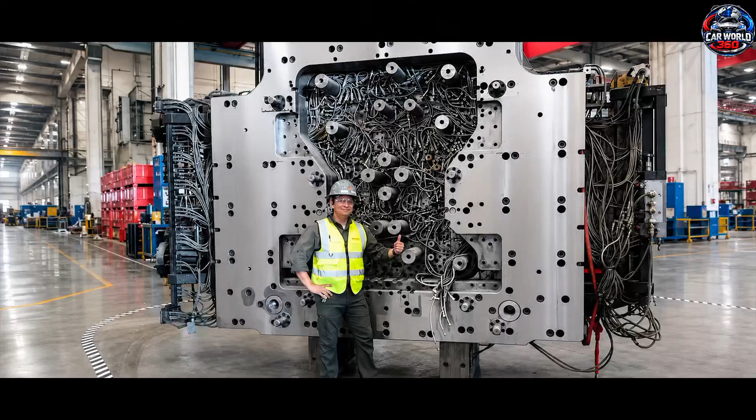This could be the largest automotive casting system ever designed, and if the latest reports are accurate, Tesla may be preparing to push Giga casting into territory the auto industry has never seen before. We are talking about a potential 50,000-ton class Giga Press, a machine so massive that its purpose is not simply to make a bigger car part, but to completely rethink how a vehicle is manufactured.

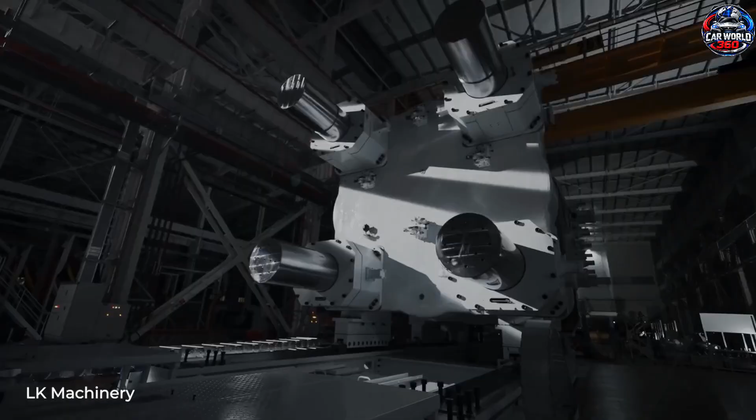And here is the crazy part: Elon Musk has openly talked about finding the limits of physics when it comes to casting machines. He basically asked one simple question: how big can a casting machine actually become? And his answer was even simpler: let's find out. Today, that question is becoming more interesting than ever, because reports and industry discussions surrounding a possible next-generation Tesla casting system suggest that the company may be exploring an enormous machine capable of producing much larger structural components with far fewer individual parts.

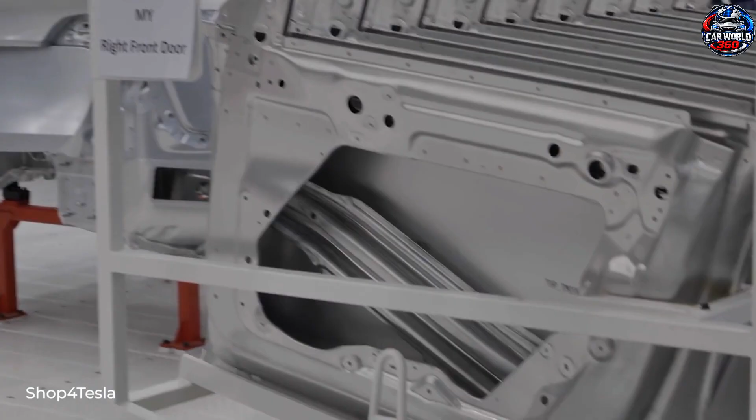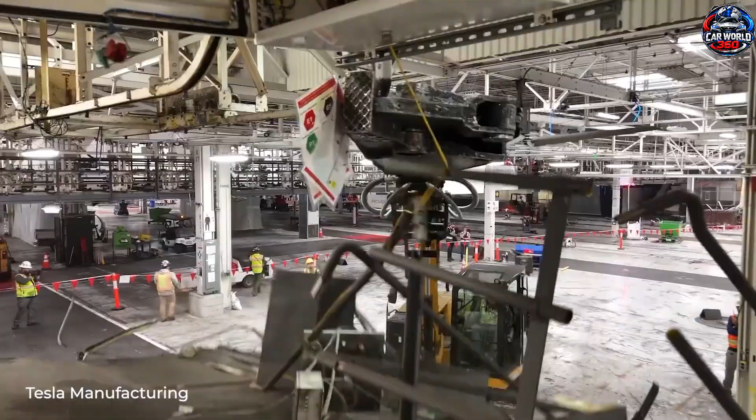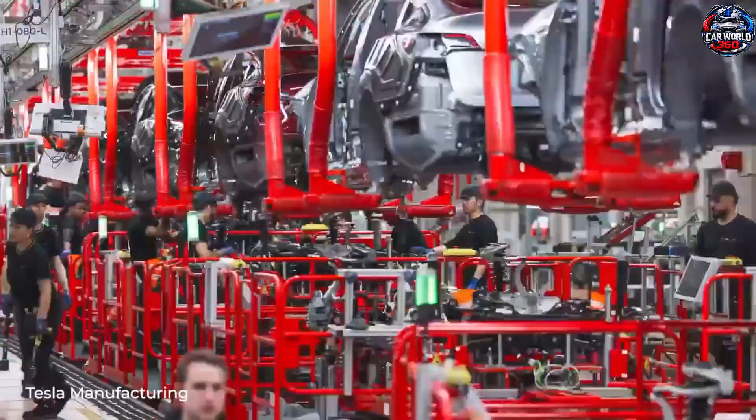Because what Tesla is trying to do here isn't just about making a bigger machine. It could change the entire production philosophy of the modern automobile. For years, Tesla has been surrounded by arguments about where the company is heading. Some people believe Tesla is becoming more focused on artificial intelligence, autonomous driving, robotaxis, and Optimus, while others argue that the foundation of the company is still its ability to manufacture millions of vehicles efficiently.

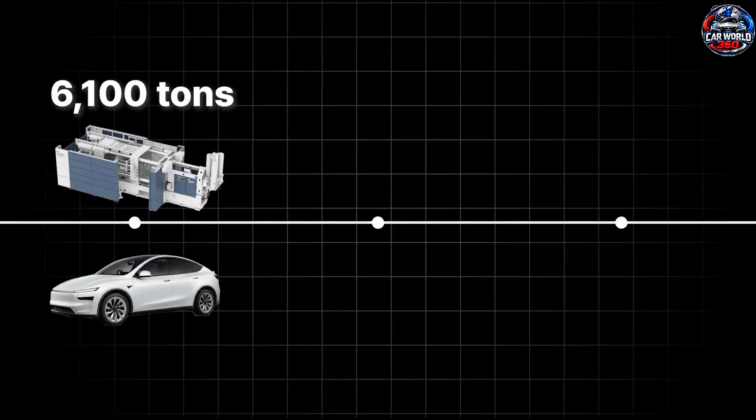And that second point is extremely important. Because while the public conversation often focuses on robots and self-driving technology, Tesla continues to work on something much less glamorous, but potentially just as powerful: how to build a car faster, with fewer parts, fewer machines, fewer workers, and fewer manufacturing steps. And that is exactly where Giga casting comes in.

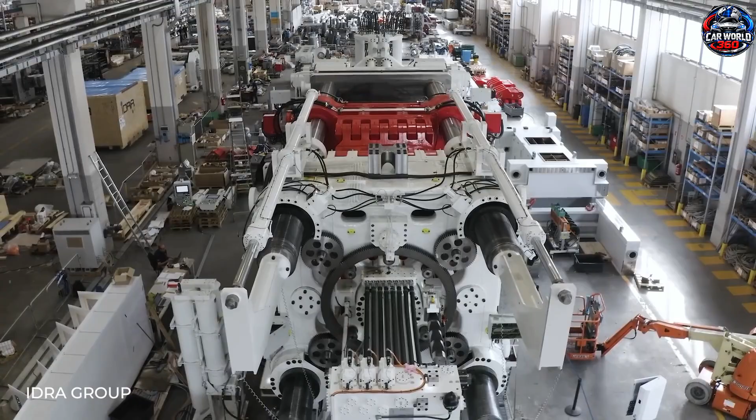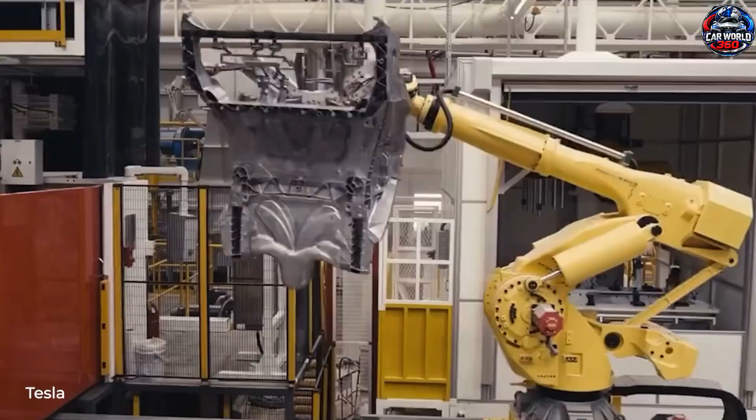Tesla's original Giga Press already changed the way the industry thought about vehicle structures. Instead of building a large section of a car from dozens of individual stamped and welded pieces, Tesla began using enormous high-pressure die casting machines to create major structural sections as single aluminum castings. That sounds like a small manufacturing improvement. It isn't. It changes the entire factory.

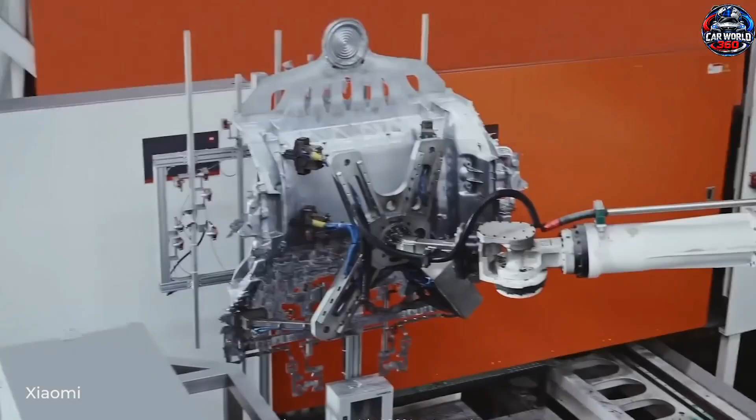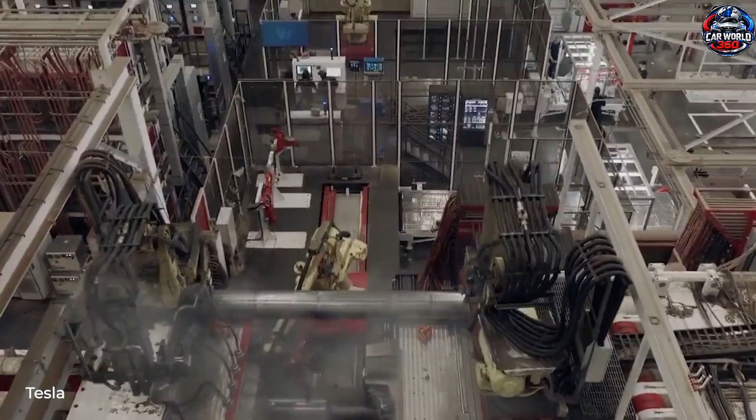A traditional vehicle structure can require dozens of individual components: welding operations, robots, fixtures, inspection stations, and transfers. With mega casting, many of those operations can simply disappear. Tesla has already demonstrated this approach with the Model Y, whose rear structure combines around 70 individual components into a much larger single casting. And now the industry is asking a much bigger question: what happens if Tesla takes that concept several steps further?

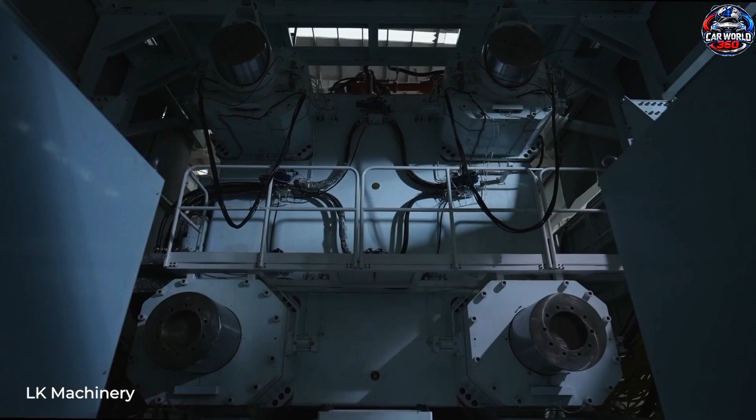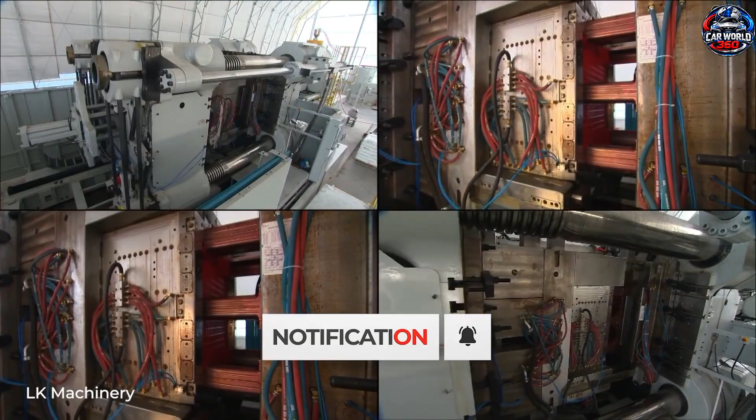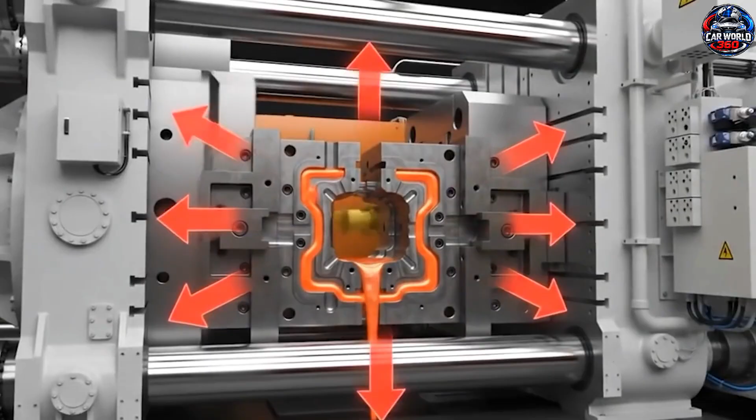Tesla has already moved through increasingly large casting machines, from roughly 6,000-ton class equipment to larger systems, including machines in the 9,000-ton and 16,000-ton range. Going from that scale toward 50,000 tons, however, would be an entirely different engineering challenge. And there is one important detail that many people misunderstand. A 50,000-ton gigapress does not mean that 50,000 tons of force are simply being pushed directly through the molten aluminum. The number primarily refers to clamping force.

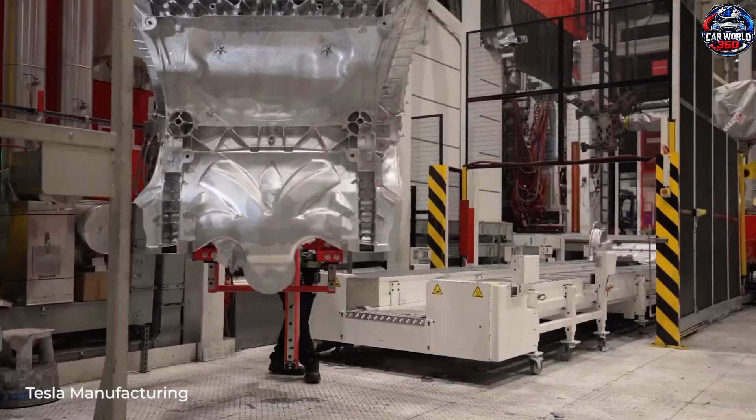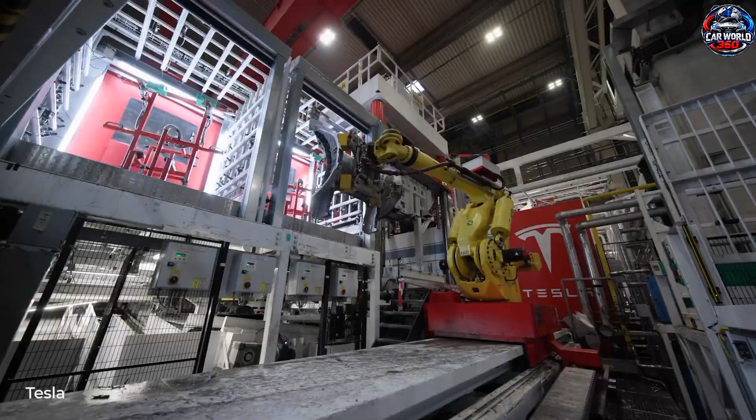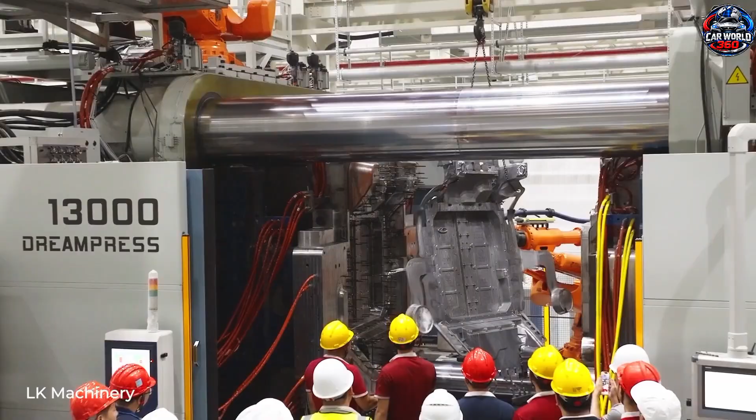And that distinction matters. Inside a high-pressure die-casting machine, molten aluminum is injected into a massive mold at extremely high speed and pressure. That liquid metal pushes against the internal surfaces of the mold. The larger the casting becomes, the greater the projected surface area. And the greater that area becomes, the more force tries to push the two halves of the mold apart. So the machine needs an enormous clamping system to keep those two halves perfectly locked together. If the clamping force is insufficient, the mold can separate even slightly, which can create flash, dimensional errors, defects, and potentially allow molten aluminum to escape.

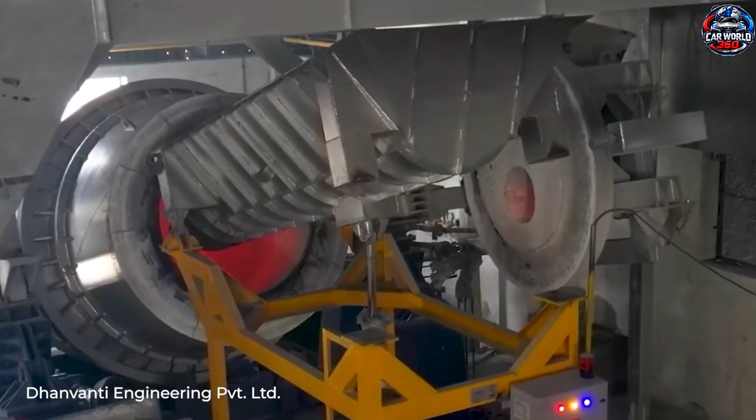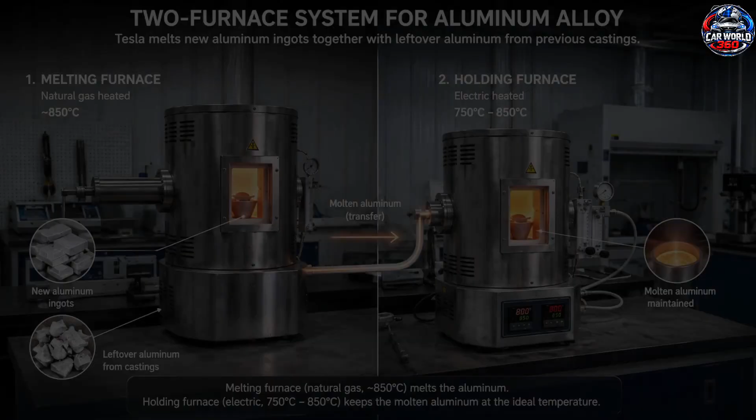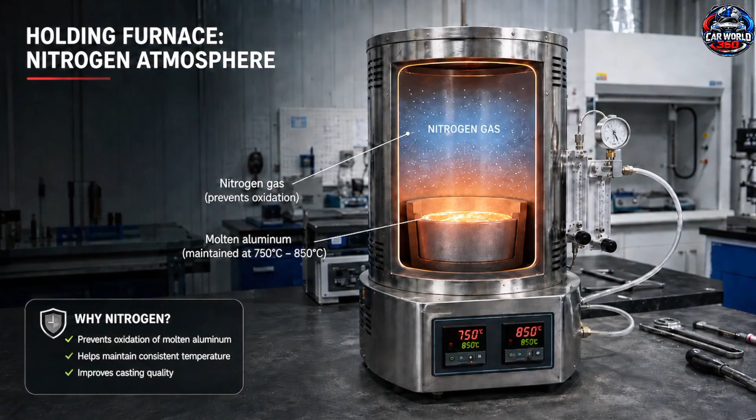Now imagine dealing with that problem on a casting large enough to form a major portion of an entire vehicle structure. Suddenly, a tiny engineering error becomes a very expensive mistake. But clamping force is only one part of the challenge. The real monster is speed. Tesla's manufacturing philosophy has increasingly focused on reducing the time required to build each vehicle. And that means the aluminum cannot simply be injected slowly and carefully. It has to move extremely quickly. The metal needs to fill the mold before it cools too much, while the machine simultaneously has to control pressure, temperature, flow, vacuum, lubrication, solidification, and dimensional accuracy.

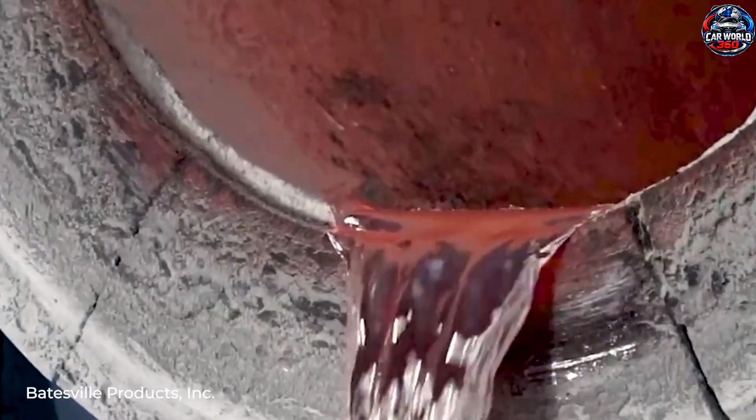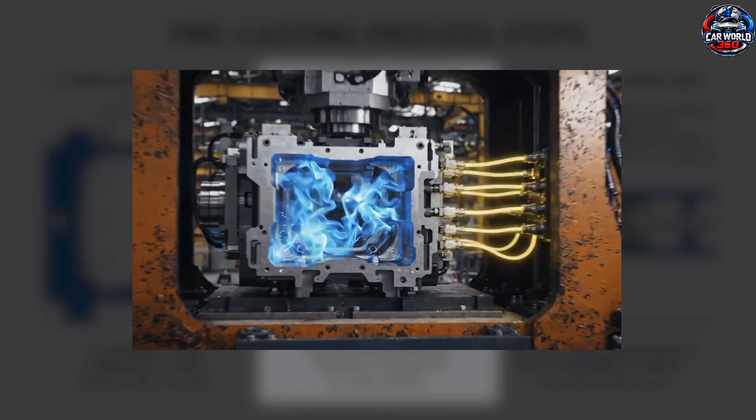That is where the next generation of giga casting becomes so fascinating. Think about what is happening inside the factory. First, aluminum has to be prepared. Fresh aluminum and recycled material can be melted in a high-temperature furnace. The molten metal then moves into a holding system where its temperature is carefully controlled before it reaches the casting machine. This isn't simply about keeping the aluminum hot. The metal has to remain within a carefully controlled temperature range so that its properties remain consistent from one cycle to the next. Contamination is another major enemy.

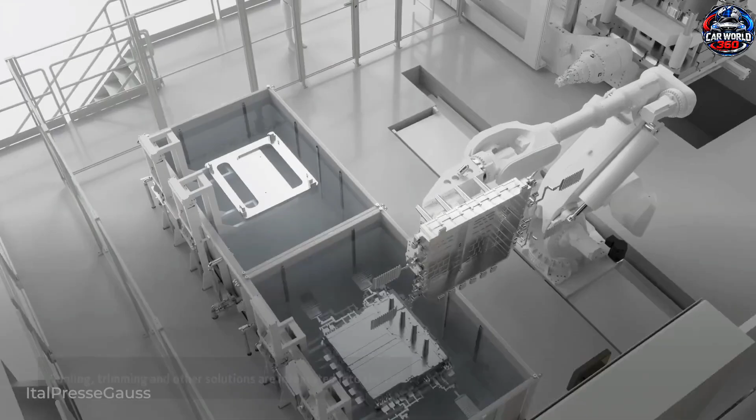Oxides and microscopic particles inside molten aluminum can create defects in the finished casting. So industrial casting systems use processes such as filtration, degassing, and controlled gas environments to help remove unwanted material and reduce the amount of trapped gas.

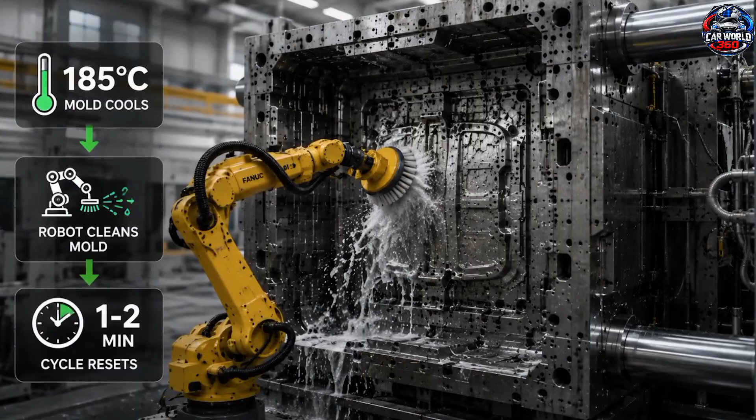That is incredibly important, because when you are making a small aluminum component, a tiny defect may be manageable. When you are making a huge structural component, that same defect can become a serious problem.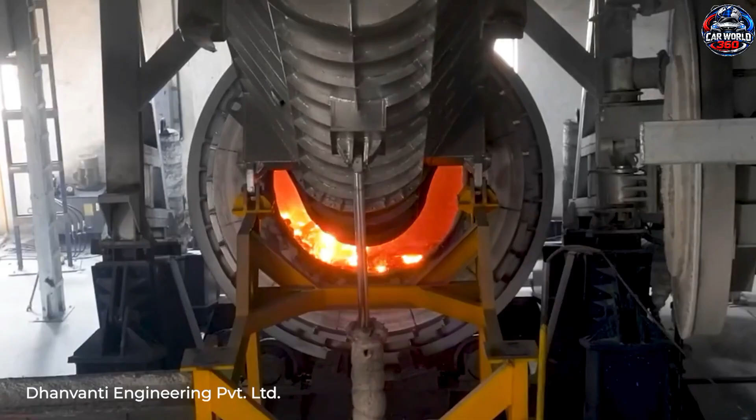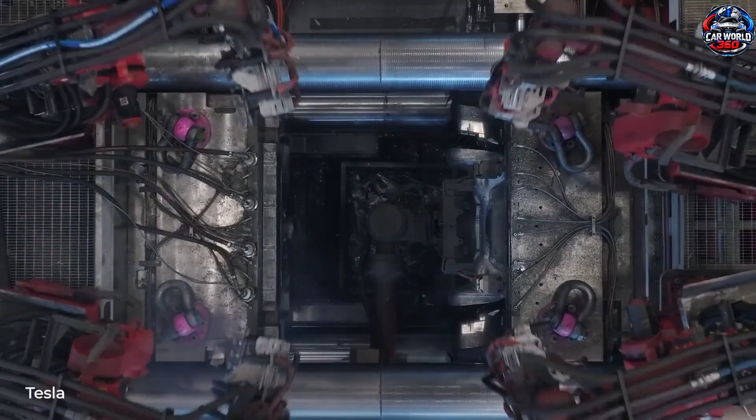Once the molten aluminum is ready, the mold itself has to be prepared. Before each casting cycle, the die needs lubrication so the finished component can be released cleanly. The mold is also carefully managed for temperature. Too hot, and the metal may not solidify correctly. Too cold, and the aluminum can freeze before the cavity is completely filled.

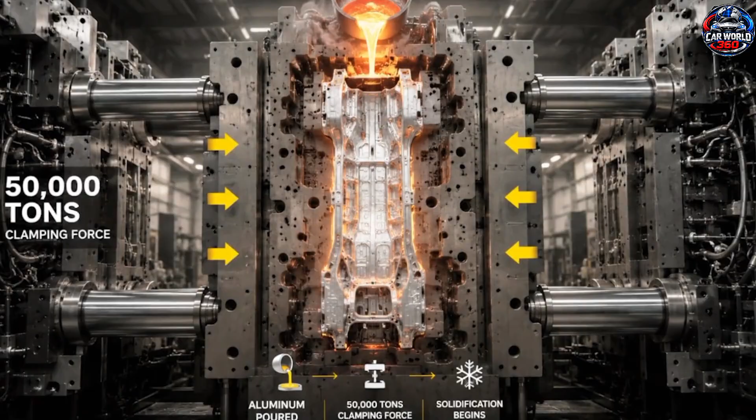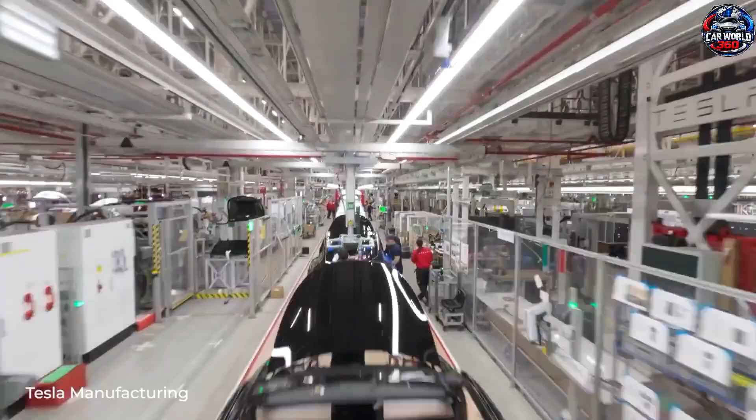It is basically a race against time. The machine has to get the metal in, fill every critical section, and begin solidification at exactly the right moment. Then comes the shot. A powerful injection system drives the molten aluminum into the die at extremely high speed. The mold closes with enormous force.

And suddenly, a liquid metal alloy is being transformed into a complex vehicle structure. This is where the 50,000-ton figure becomes truly impressive. The machine is essentially fighting the enormous forces generated inside the mold while simultaneously controlling a process that takes place in seconds. And if Tesla can make that process reliable at massive scale, the potential manufacturing gains are huge.

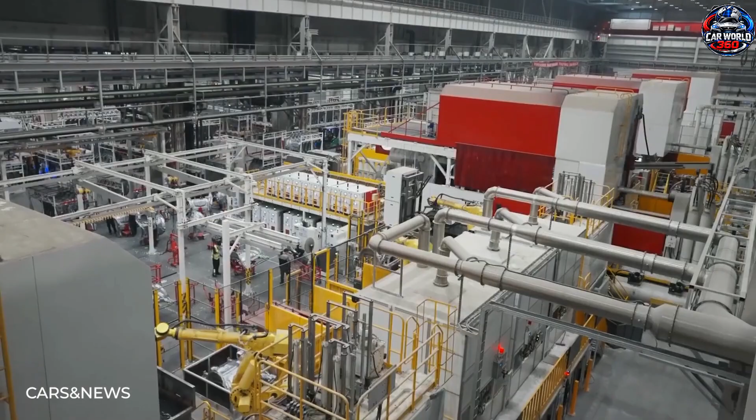Instead of producing dozens of separate pieces and moving them through different assembly stations, a much larger casting could potentially combine many structural functions into one component. That means fewer welds, fewer fixtures, fewer robots, fewer transfers, fewer opportunities for assembly mistakes, and potentially a much smaller factory footprint for the same production capacity.

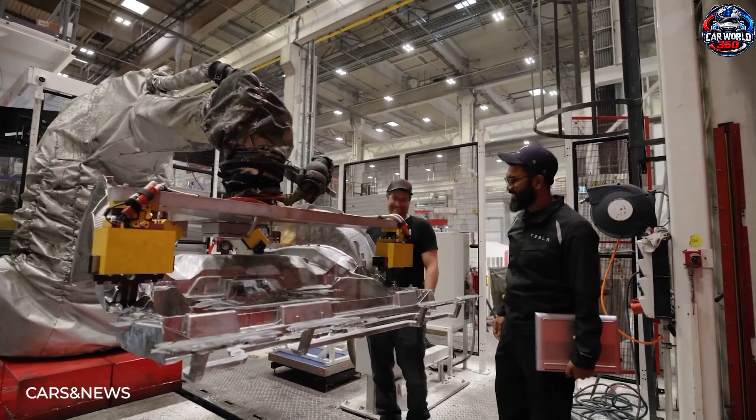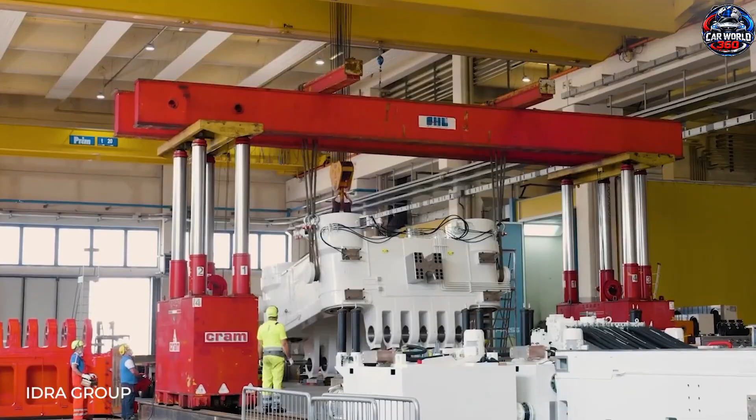This is the part that makes giga casting so important. Tesla isn't simply automating the old manufacturing process. It is trying to eliminate parts of the old manufacturing process altogether. That is a completely different strategy. Traditional automation says, take the existing process and make the robots faster. Tesla's approach is closer to, why do we need those steps in the first place?

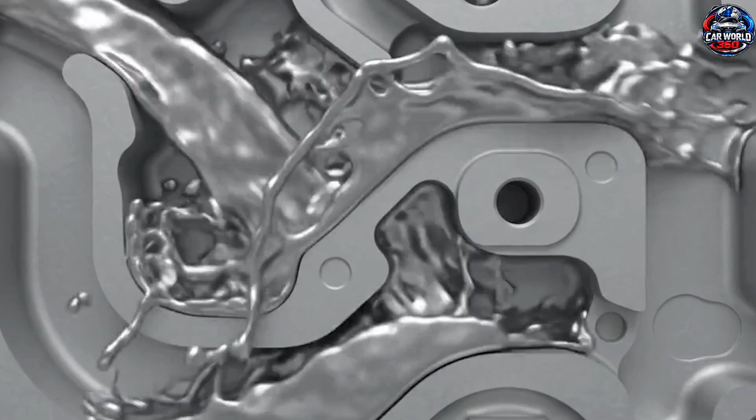And this philosophy has already produced dramatic changes in Tesla's factories. The company has previously highlighted major reductions in the number of manufacturing operations and robots required for certain vehicle structures. Now imagine applying that philosophy to an even larger casting. A single machine could potentially replace an enormous amount of assembly work.

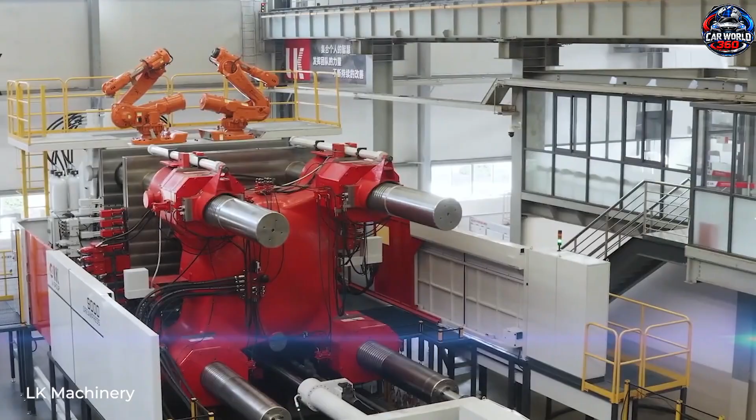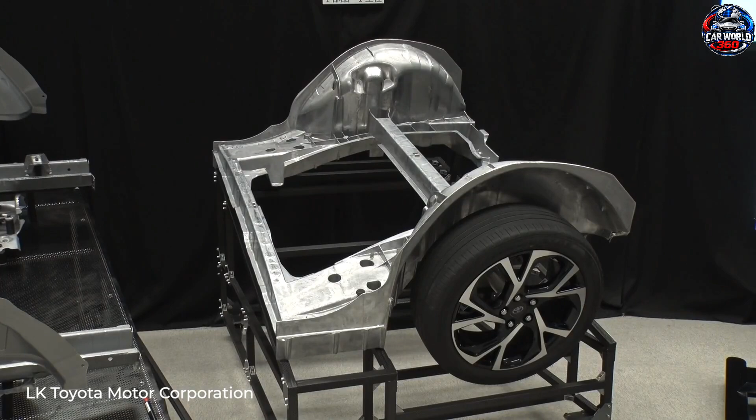But there is a catch. Actually, there are several. The bigger the casting becomes, the harder it becomes to control. A huge mold creates huge thermal gradients. The aluminum has to flow through complex geometry. The machine has to maintain incredibly precise pressure. The vacuum system has to remove air effectively.

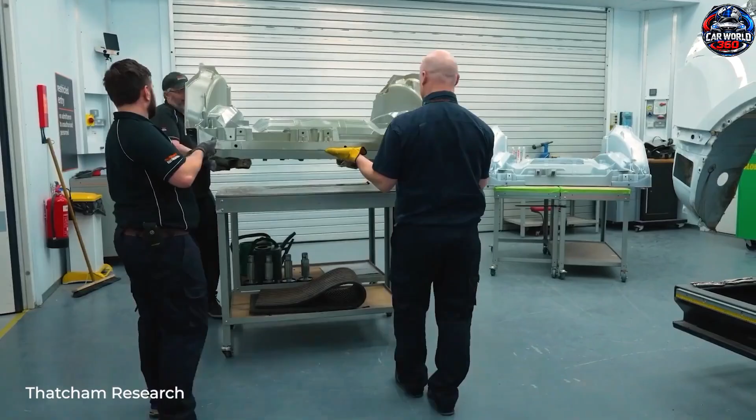And the cooling process has to happen quickly enough without creating internal stresses or defects. One small trapped pocket of gas can become a hidden weakness. One area that cools too early can prevent complete filling. One section that cools differently from another can create distortion. And that means Tesla can't simply build a machine that is 10 times larger and expect everything else to work the same way.

The entire system has to evolve. The injection system, the die, the cooling channels, the sensors, the control software, the vacuum system, the robots, the inspection process, everything. This is why a next-generation Giga Press would be much more than a giant hydraulic machine. It would essentially be a complete manufacturing ecosystem.

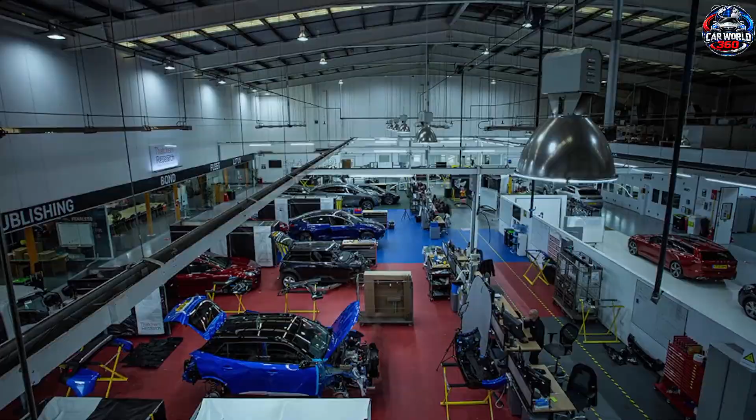And that brings us to another fascinating question. What happens after the casting comes out? Because the part isn't finished just because it has left the mold. The casting must cool. It must be inspected. Excess material may need to be trimmed. Critical dimensions need to be checked. And increasingly sophisticated inspection methods can be used to identify defects that aren't visible to the human eye.

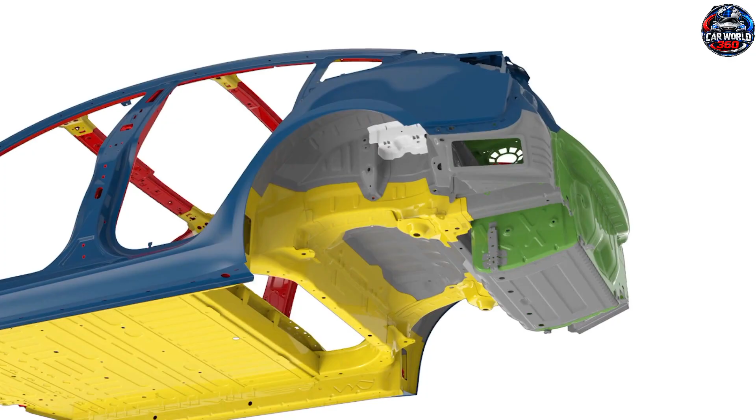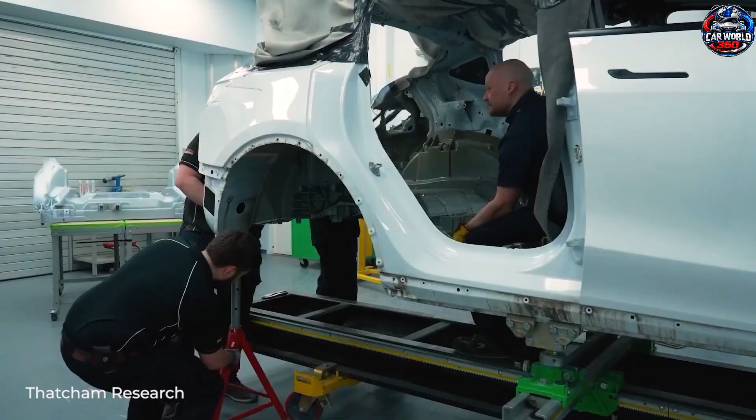For a structural part, that inspection is absolutely critical, because the biggest advantage of mega casting is also one of its biggest challenges. You are combining many parts into one. That means you eliminate hundreds of connections. But you also make the remaining structure extremely important.

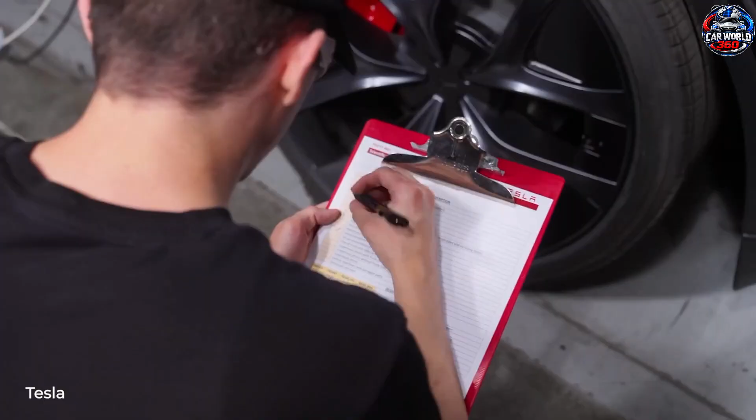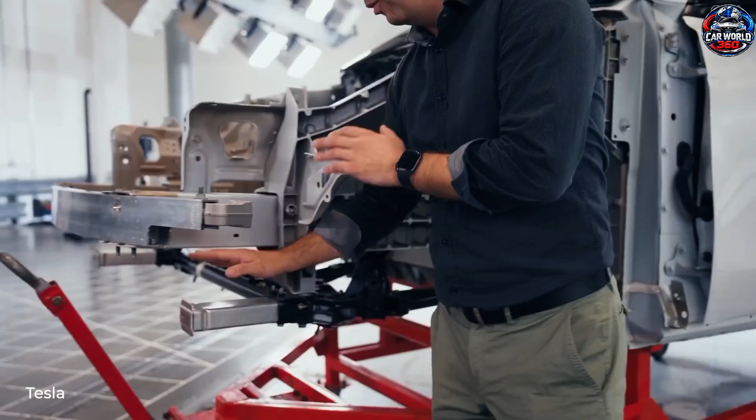For years, critics argued that this could create a major repair problem. Their argument was simple. If a traditional vehicle structure has 70 pieces and one gets damaged, replace the damaged piece. But if those 70 pieces become one giant casting, what happens when one section gets damaged? Does the entire structure have to be replaced at first glance? That sounds like a serious weakness.

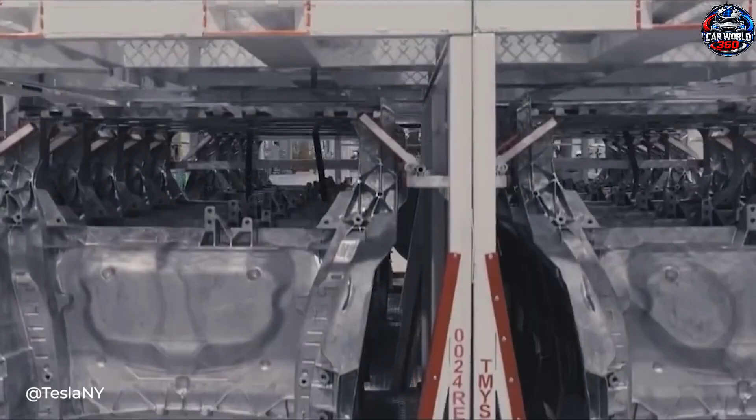But real-world research has made the story much more complicated. In 2025, Thatcham Research published the results of a 2-year study examining Tesla's mega casting technology. The research included crash testing, damage assessment, and repair studies. And the results challenged one of the biggest criticisms of mega casting.

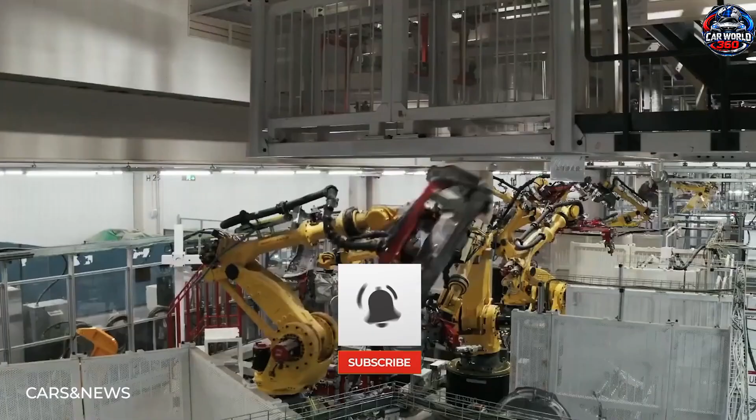The researchers found that, when the casting is designed with repairability in mind, repair costs can actually be lower than those of traditional multi-piece structures. That is a huge finding. It means the real question isn't simply whether a car has a giant casting. The question is whether the automaker designs that casting so technicians can actually repair it.

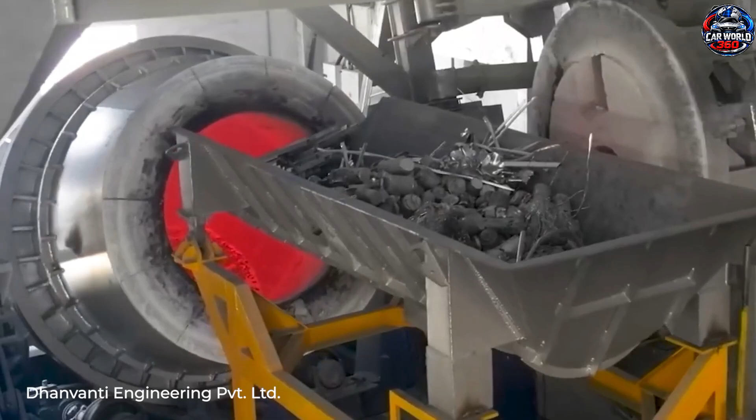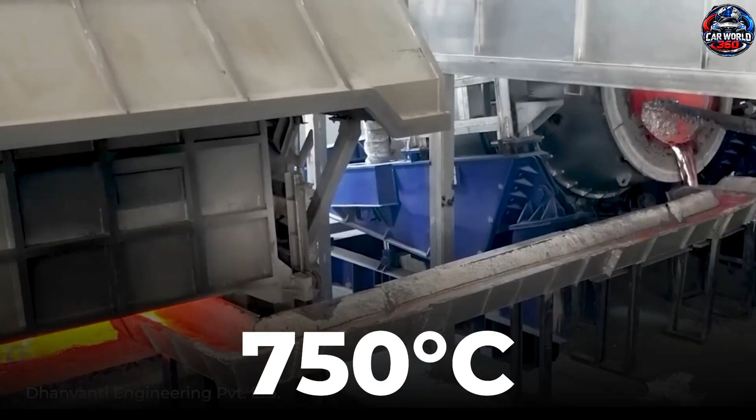Tesla's Model Y provides an interesting example. The rear mega casting can be repaired using defined procedures, including partial replacement of certain sections where appropriate. And according to Thatcham Research, Tesla's design choices can make some repair scenarios less expensive than conventional structures. The research also showed something else that is extremely important.

Mega casting doesn't automatically mean that every damaged vehicle needs an entire structural replacement. In some situations, only the damaged section needs attention. In more serious crashes, however, full replacement may still be necessary. So the technology isn't magic. It simply changes the engineering equation.

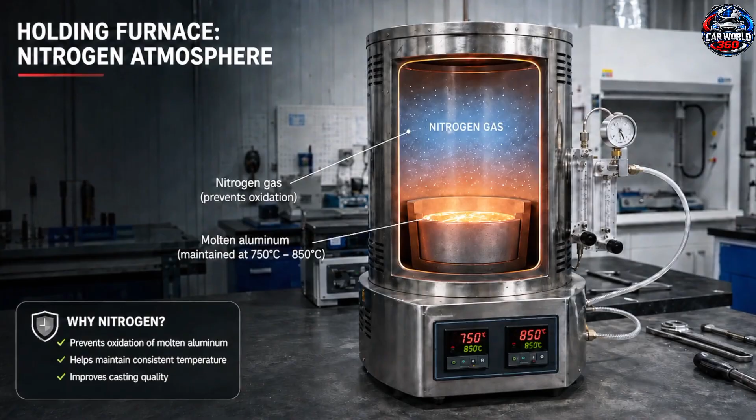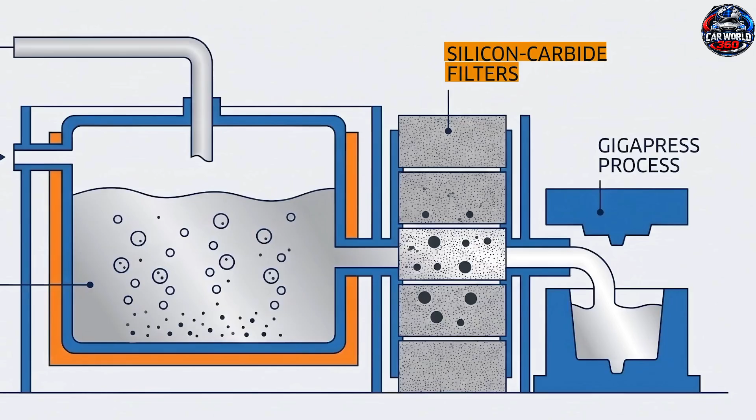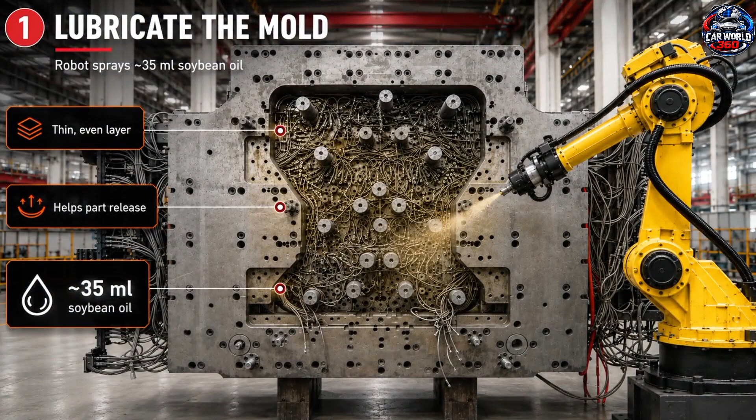And that distinction is becoming increasingly important because Tesla isn't the only company interested in this technology anymore. Major automakers around the world are exploring large-scale casting and mega-casting strategies. Toyota, Ford, Volkswagen, Hyundai, and other manufacturers have all shown interest in large structural casting technology. That means Tesla's experiment is gradually becoming an industry-wide manufacturing trend.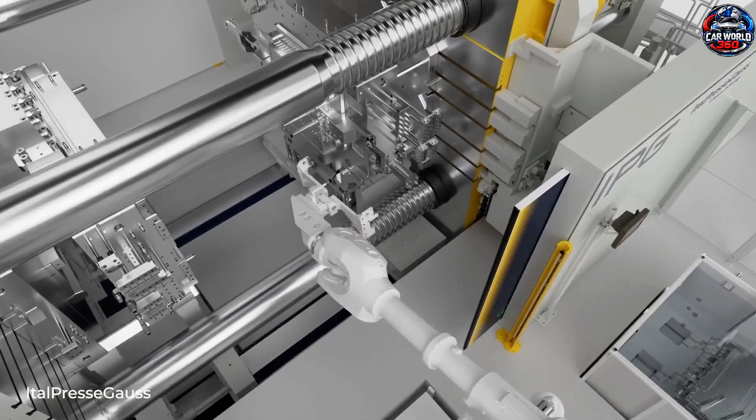And that could be one of the most important parts of this entire story. Because Tesla's real advantage may not be owning one enormous casting machine. The bigger advantage could be learning how to design vehicles around that machine from the very beginning. Think about it. If engineers design a car around traditional stamping and welding, the vehicle naturally ends up with many separate components. But if engineers start with the idea that huge sections can be cast as one piece, they can redesign the architecture around that capability.

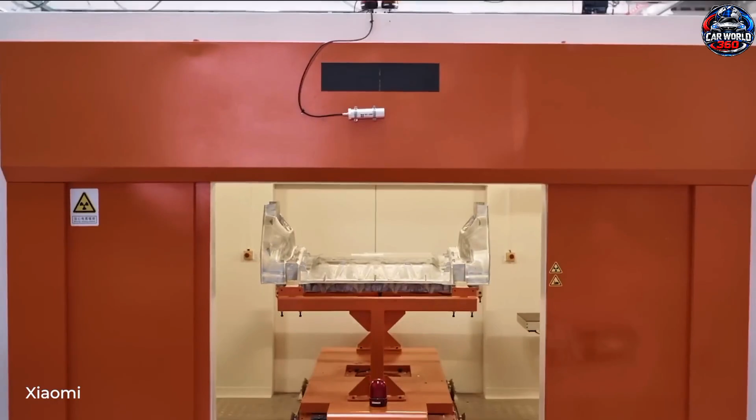The factory is then no longer adapting to the vehicle. The vehicle is being designed around the factory. That is a massive shift, and it could become even more important for future affordable EVs. Because lowering the cost of an electric vehicle isn't only about making a cheaper battery. You also have to reduce the cost of everything around the battery: the body, the chassis, the assembly process, the number of components, the amount of factory equipment, the labor required, and the time needed to build every vehicle.

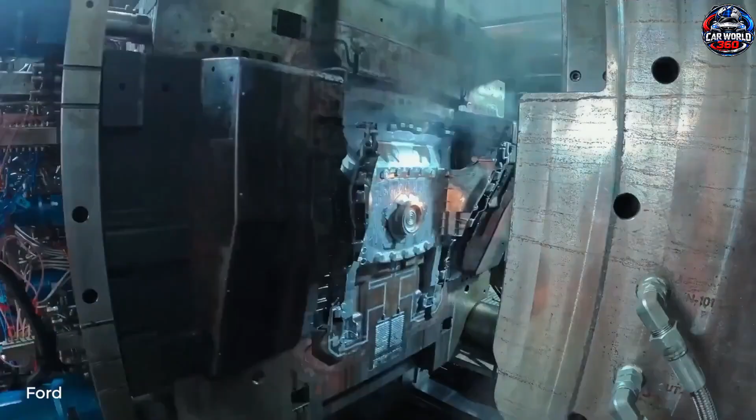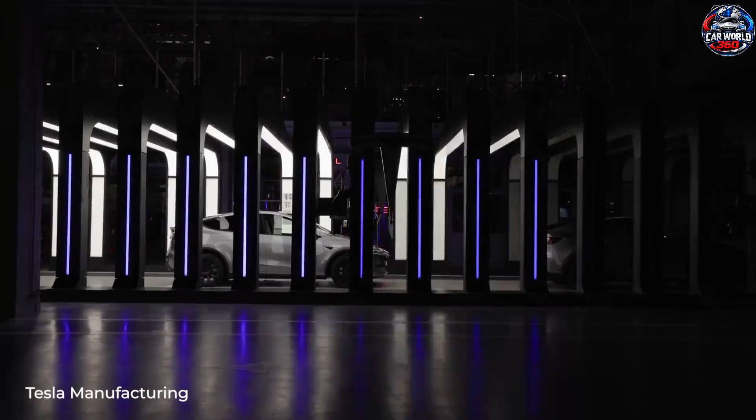This is why a giant casting machine could have an impact far beyond the machine itself. If Tesla can reduce hundreds of assembly operations into a handful of high-speed manufacturing steps, the savings could multiply across millions of vehicles. And that is exactly why Elon Musk has repeatedly pushed the idea of finding the limits of manufacturing physics. The goal isn't simply to build the world's biggest machine. The goal is to discover whether an entirely different way of building cars is possible.

Now, there is still a major question. Is the 50,000-ton Giga Press definitely producing Tesla vehicles today? Not necessarily. Some of the most dramatic claims circulating online about a 50,000-ton machine, production speeds of only a few seconds, or specific future Tesla models should be treated carefully unless Tesla officially confirms them.

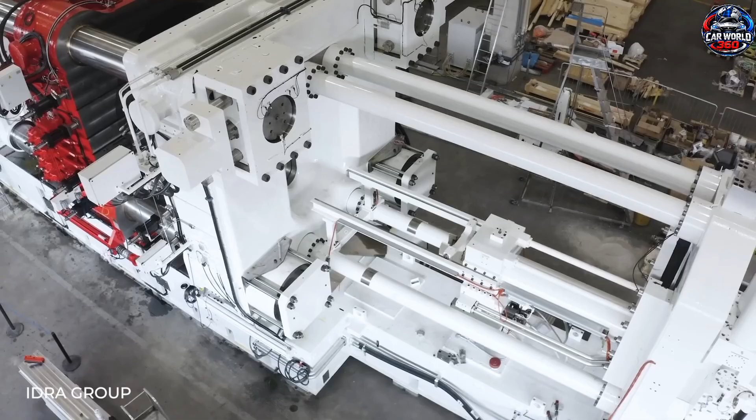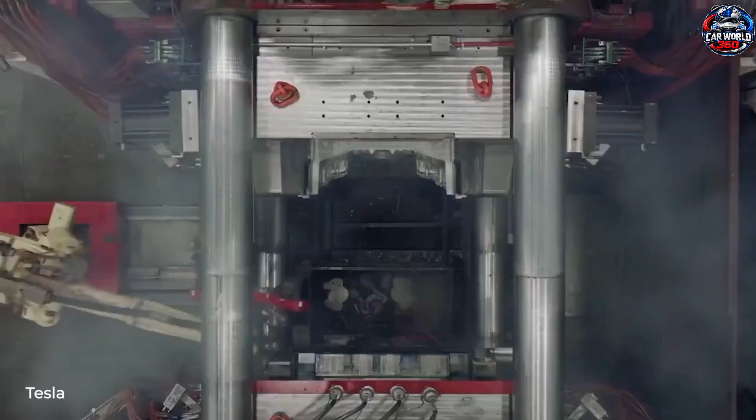That distinction matters. The technology is real. Tesla's mega casting strategy is real. The industry's movement toward larger casting machines is real. But specific future production numbers, machine configurations, and vehicle applications can change during development.

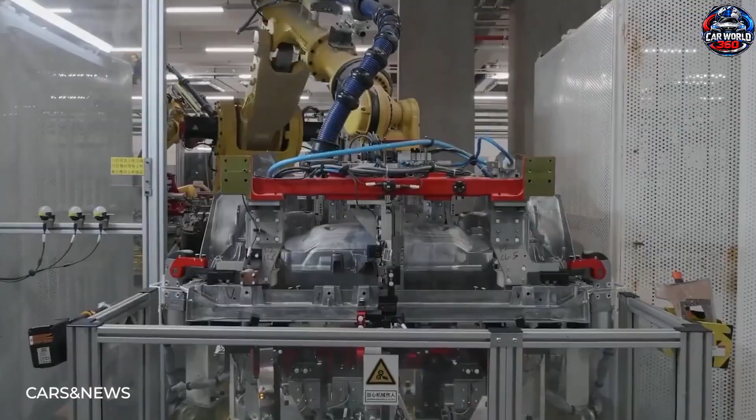And honestly, that uncertainty makes the story even more interesting. Because Tesla has already shown that the company is willing to push manufacturing technology much further than the industry initially expected. The first Giga Press looked enormous. Then came larger machines. Now engineers are discussing machines that would make earlier systems look almost ordinary. And if a 50,000-ton class system can eventually operate reliably at high production volume, the consequences could reach far beyond Tesla. It could force every major automaker to rethink how a vehicle should be assembled.

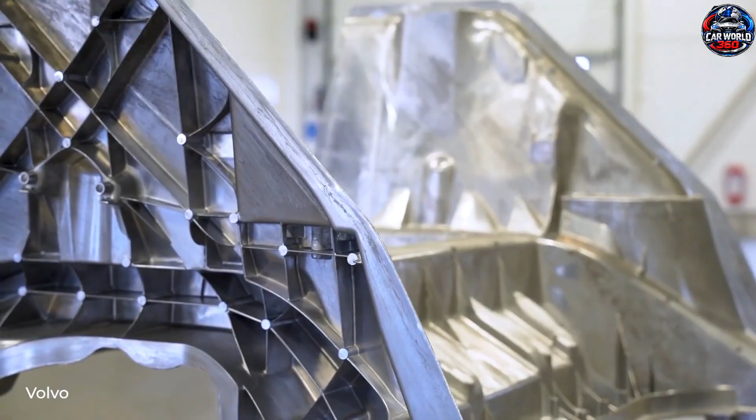Imagine walking through a factory where hundreds of workers and robots once assembled dozens of structural components. Now imagine replacing a huge portion of that process with a small number of extremely powerful casting systems. That is the manufacturing revolution Tesla is chasing. Not more steps. Fewer steps. Not more parts. Fewer parts. Not a larger factory. A smarter factory.

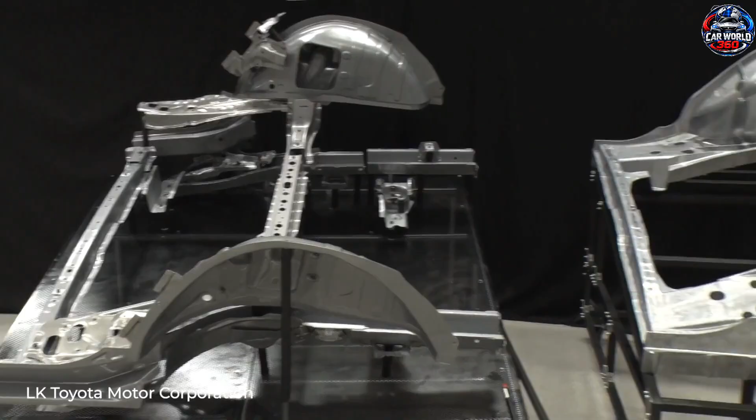And perhaps that is the real meaning behind Elon Musk's question about the limits of physics. How big can a casting machine become? Maybe the final answer isn't simply 50,000 tons. Maybe it is whatever size allows the machine to eliminate the next major layer of manufacturing complexity. Because once you start thinking about manufacturing this way, the Giga Press stops looking like a giant machine.

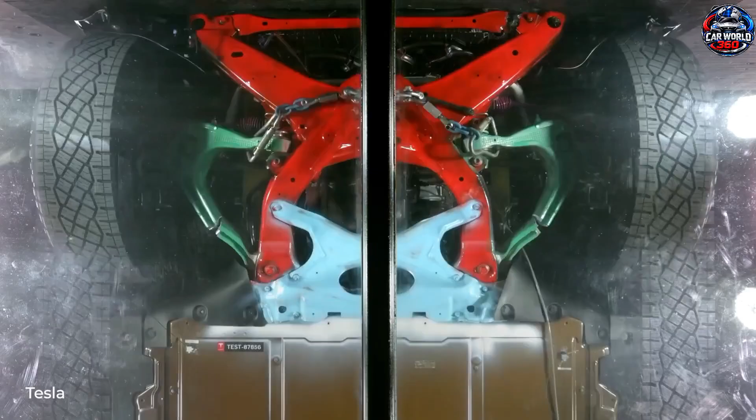It starts looking like the foundation of an entirely different kind of factory. A factory where a vehicle isn't assembled from hundreds of pieces. It is created through a small number of highly integrated manufacturing operations. And if Tesla can make that system fast, reliable, affordable, and repairable at massive scale, the biggest impact may not be the machine itself. It may be what every other automaker is forced to do afterward.

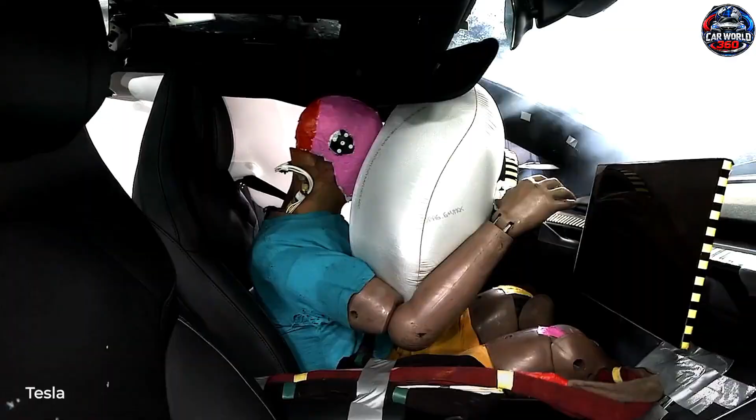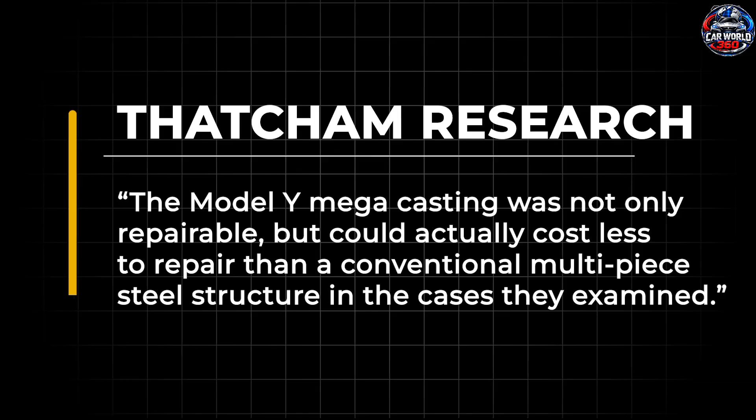So the real question isn't whether Tesla can build a 50,000-ton Giga Press. The real question is this. If Tesla actually makes this technology work at scale, how many traditional manufacturing steps will still be necessary? Because that is where things get really interesting. The next generation of cars may not be defined only by bigger batteries, faster computers, or more powerful motors. They could be defined by something most people never see, the machine that builds them. And Tesla may be trying to make that machine bigger, faster, and more efficient than anything the automotive industry has ever seen.

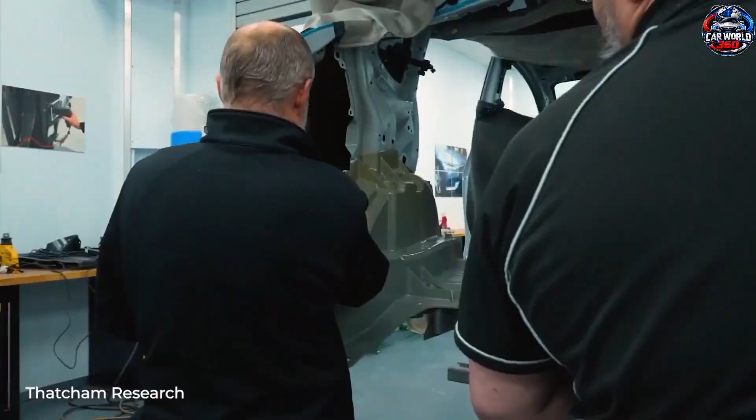Because the next revolution in the automotive industry may not happen on the road. It may happen inside the factory.